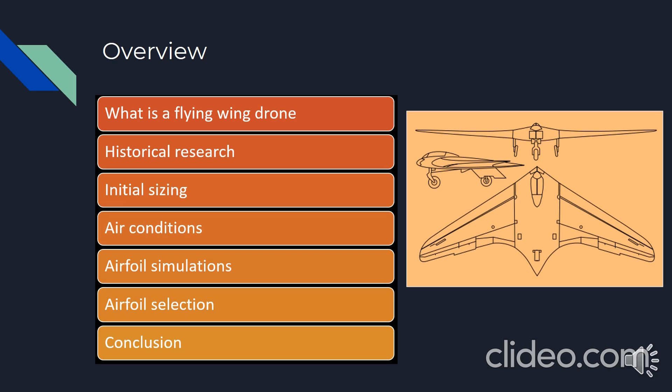The principal characteristic of flying wing drones is that they lack an empennage, so the wing is responsible for generating lift and stability. To help with stability, they normally have a swept-back wing configuration, and for wing efficiency, a pusher propulsion configuration.

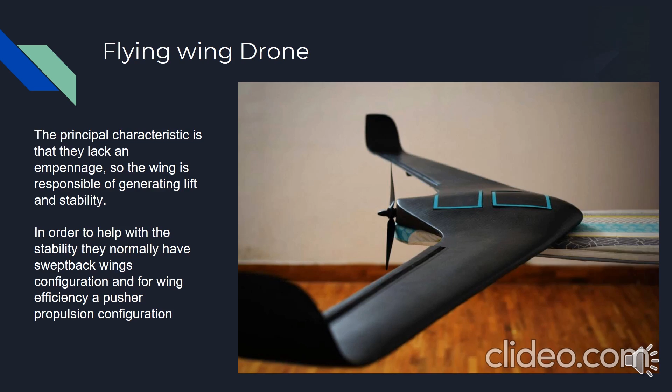The first aircraft is the Skywalker X-8, a delta-wing commercial aircraft with pusher-type swept-back configuration.

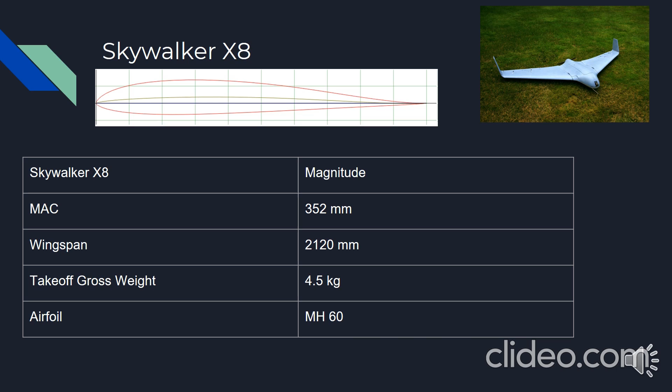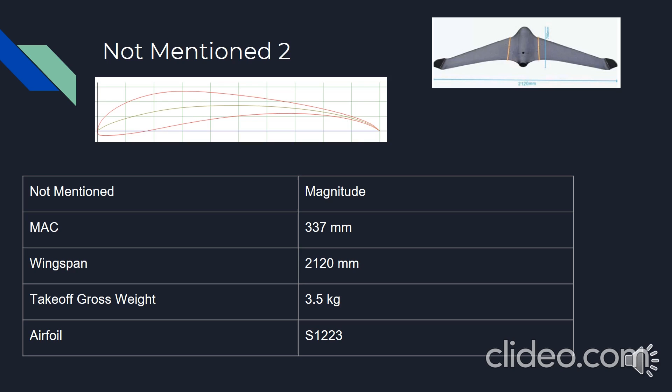The next one is an experimental aircraft designed in a thesis with a pusher-type swept-back configuration. This is another experimental aircraft designed in a thesis with a pusher-type swept-back configuration.

The Wingtra PPK is a VTOL aircraft, that is to say with vertical takeoff and landing, but is still considered a flying wing because it does not have an empennage. It is a puller type configuration with an elliptical wing.

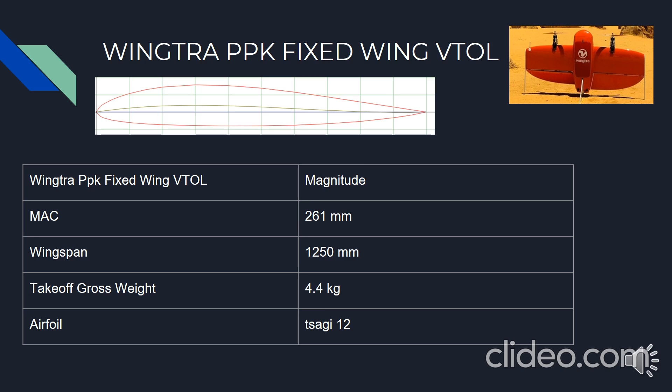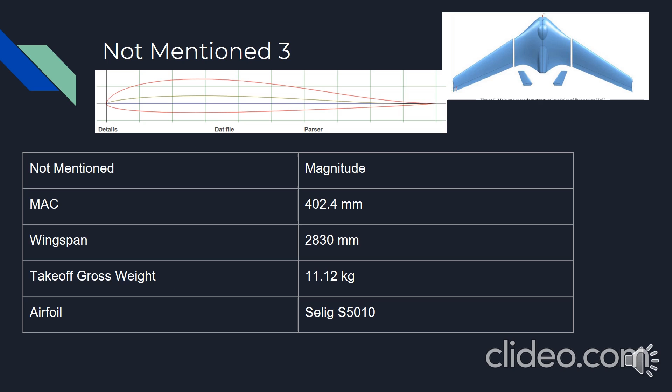The next one, this is another aircraft made for a thesis. It is a delta wing commercial aircraft with pusher type swept-back configuration.

The Geri has the same characteristics, but in this one we could see that the wingspan surpasses the limit of 3 meters that we put, but since it is by very little, we keep it in the list.

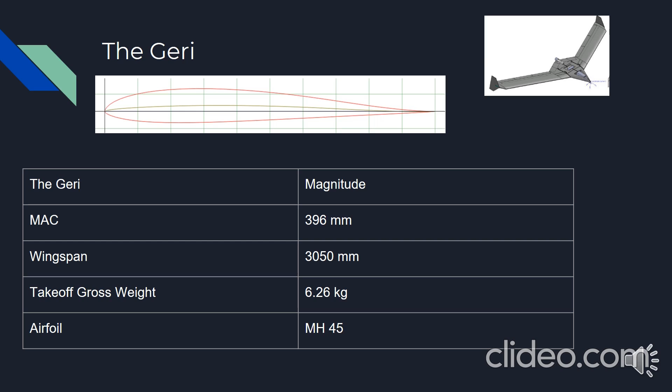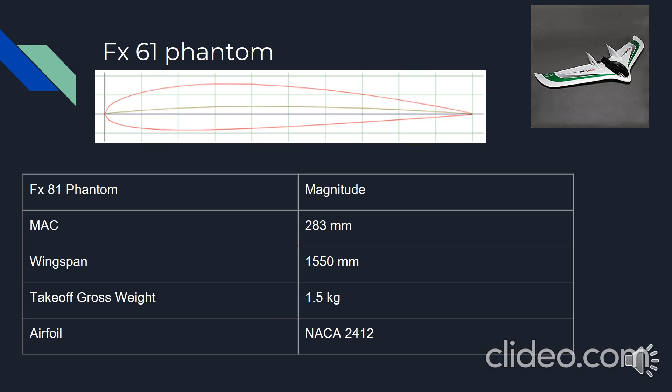And the last one is the FX-61 Phantom, a delta-wing commercial aircraft with pusher-type swept-back configuration.

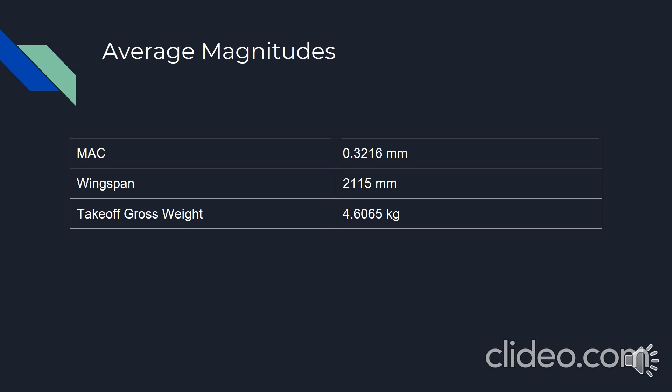With the measures of all the aircraft, we get these values for average magnitudes. For MAC, that is mean aerodynamic chord, we get 0.3216 millimeters. For wingspan, we get 2115 millimeters. And for takeoff gross weight, we get 4.6065 kilograms.

One of the crucial parts when analyzing an aircraft is knowing where that aircraft is going to fly, or the air conditions. So in this case, we're going to take the air conditions at sea level.

The analysis will be done with software named XFLR5, and there, in the Type 2 analysis, it will request the density and also the kinematic viscosity of the fluid. So we are going to see how to calculate each one.

The dynamic viscosity versus the temperature has a linear behavior. So by using the general equation of the straight line, we can obtain, in this case, with this initial data gathered from the book Aerodynamics by Anderson, the sea level air conditions.

So it's at 0 meters height. The temperature at 0 meters is 288.16 Kelvin. The density of the fluid, we also get right away: 1.225. Also, the dynamic viscosity at 0 degrees and the dynamic viscosity at 30 degrees.

We know that these will behave in a linear fashion, so by using the general equation of the straight line, we obtain the value at the 15 degrees that we need. Using this, we obtain that the dynamic viscosity is 1.8 times 10 to the minus 5 kilograms over meter per second.

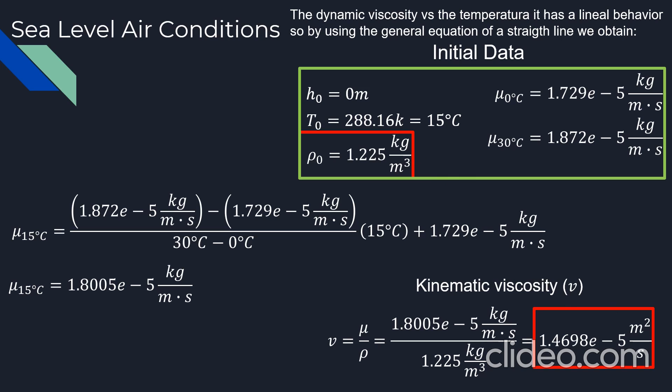The kinematic viscosity we can get by dividing the dynamic viscosity by the density. So in this case, we do this and get the result of the kinematic viscosity. With these two values, we plot this and put these details into the XFLR Type 2 analysis.

By using the average gathered from the research data that we had from the previous airplanes, and also using the air conditions at sea level calculated before, we can now generate the Type 2 analysis of XFLR5, so we can get the following plots. We will be analyzing each airfoil for each aircraft that we have.

So we have the airfoil MH60, and the thing that excels with this airfoil is the coefficient moment, which is almost minimum. This is very good because with this type of aircraft, we don't have an empennage, so the stability must come from the wing itself. By having a low coefficient moment, we can get very good stability throughout the airplane.

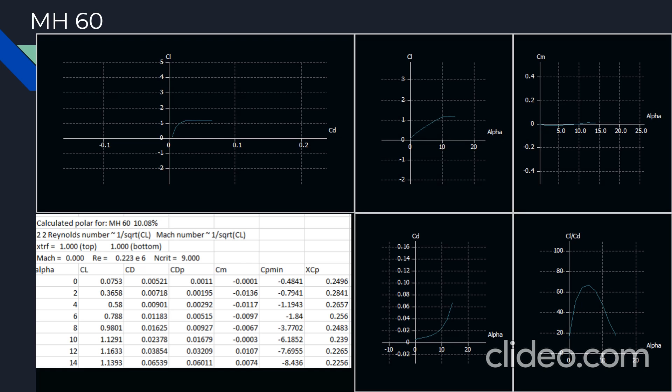We also have the GOE 438. With this one, we can see that we have high lift across alpha and also a low coefficient moment, but not as low as the previous one.

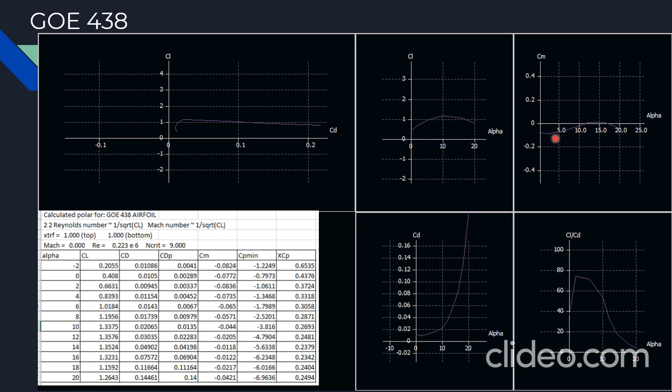We have the S1223. This has very high coefficient lifts throughout alpha, but the thing that affects us a lot is the coefficient moments. With this type of aircraft, we don't really need a lot of coefficient lift, we need a lot of stability because we don't have an empennage that will help with that.

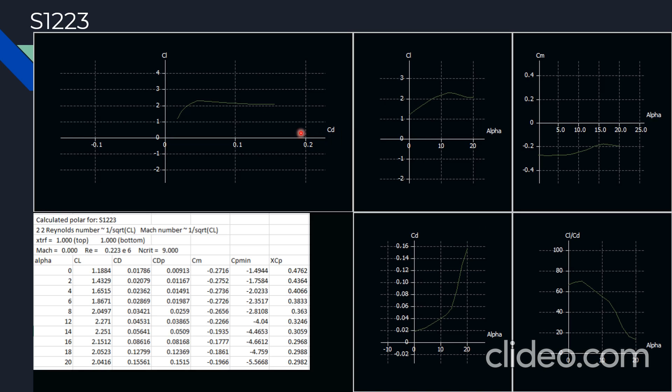So for this one, the TSAGI 12, we have a coefficient lift that's decent but not that high, and the coefficient moment is also good but doesn't excel like the MH60. What it has is low coefficient of drag throughout low degrees of alpha, but the overall efficiency of the aircraft is low, like only 70, and that's a low efficiency to have.

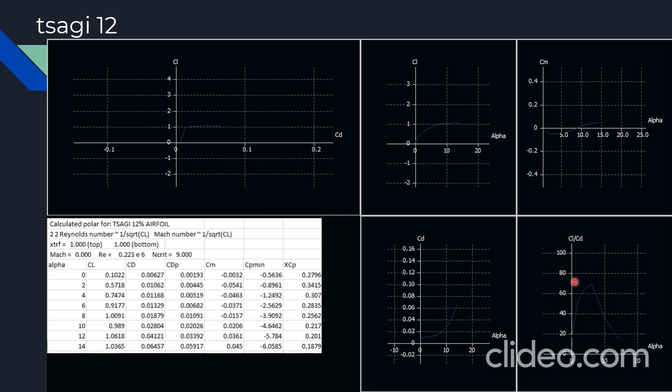The S7055, on this one we have high drag on high degrees of alpha, and also a lower efficiency, but as we can see, we have a very good lift, and the coefficient moment doesn't go that low. So we have very good results on these ones.

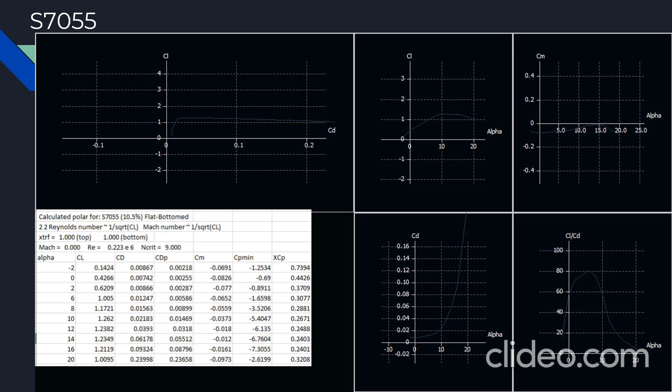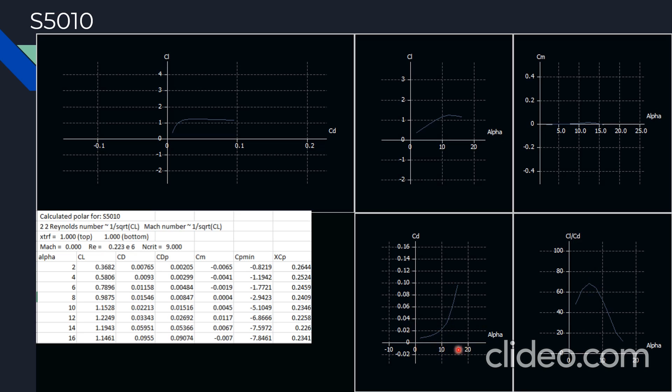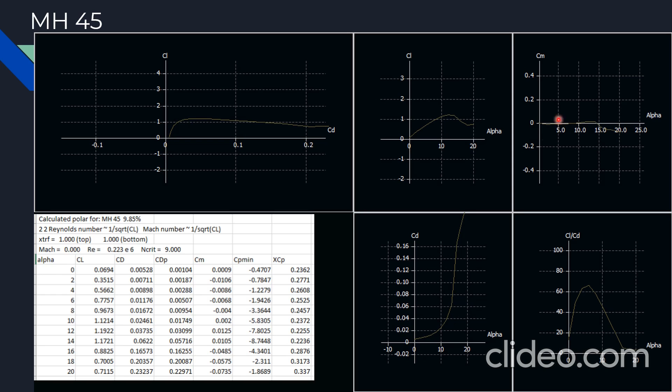The MH45, we have the exact same problem as the previous one. We have a high drag coefficient, minimum coefficient of lift, but we can get a very good coefficient of moments throughout low alphas.

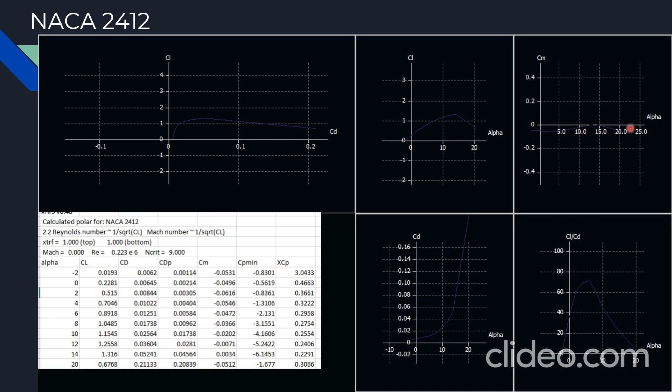The NACA 2412, with this one it's a very good candidate, but it doesn't excel in anything. We have high coefficient lift throughout high alpha, but we have higher drag coefficients, so they decrease our efficiency throughout, and also the coefficient moments is decent, but we have better ones.

Using all of this information, we gather the following table and we grade them from 0 to 10. We grade them using this table, and we gather the totals so we can decide which one is the best. We know we need a good coefficient moment because we don't have an empennage to help with stability, and we don't need high coefficient lift because we don't have that much weight on the structural part.

So we don't have a lot of weight, but we need a lot of moment, and in this case, this is the winner that we have. We choose the MH60, due to the great coefficient moment, due to the great efficiency that it has, and the overall total that it achieved.

But I think between these two, these are the best that we found to have. I think that we're going to stay with this one, the MH60, due to the higher score and due to the coefficient moment.

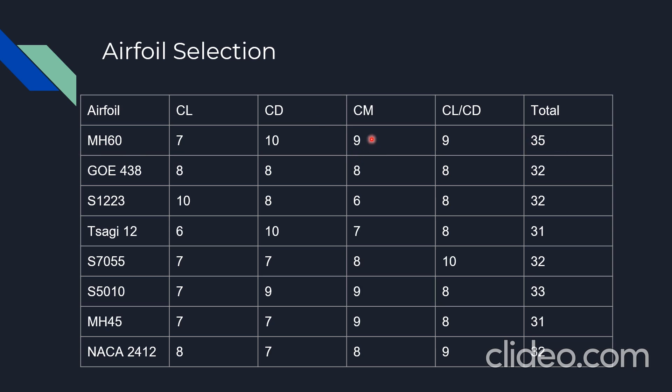So in conclusion, we choose the airfoil MH60 due to the good overall results from XFLR5 on the coefficient of lift, the drag, and the moment. In a few words, this airfoil was chosen for the great performance it has during flight, due to the lift and drag values it has in different flight stages, and also because of the low moment it has.

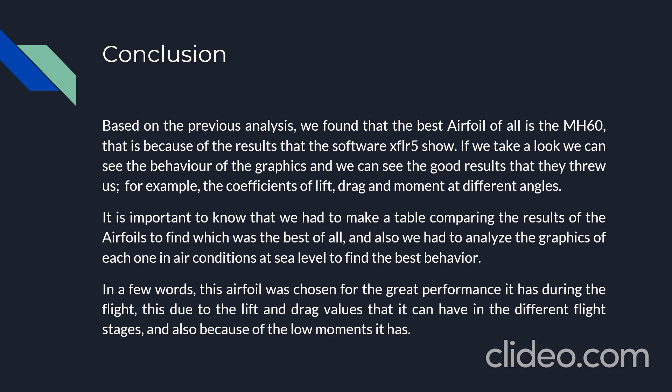This is a very good thing to have in this type of aircraft, as I was saying, due to not having the empennage. So we will need to get everything from the wings.